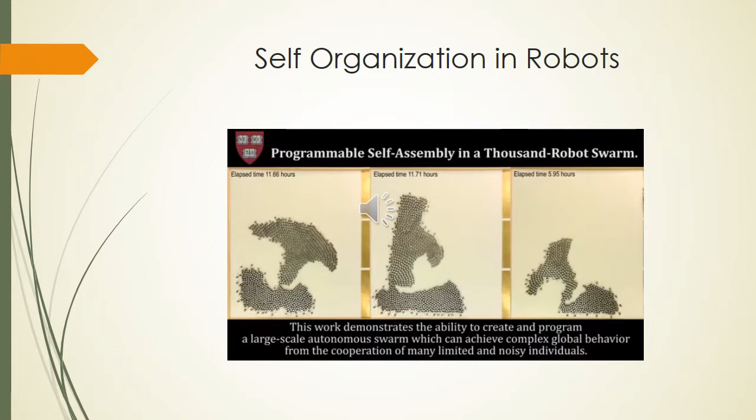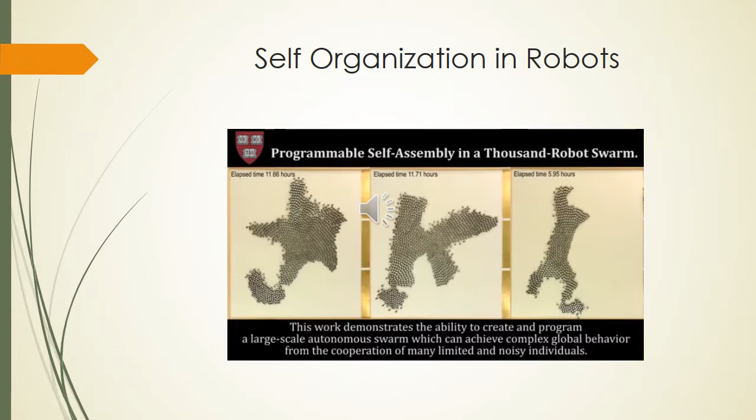In this slide, we have a video on a project conducted by Harvard University which employed self-organization in robots.

There are two types of virtual forces which are applied to the swarm. That is local force, which consists of attraction and repulsion, and which maintains the stability in a swarm, and an advanced force, which is responsible for the swarm to propagate to its goal. So using these virtual forces, stability is maintained in the swarm and it also achieves its goal.

The next method is a dynamic leader based swarm control. This is a central control approach in which a leader is leading a swarm. But unlike other control approaches, the leader is dynamically rotated in the swarm. This is done using a random competition-based clustering algorithm which is used to distribute the leaders as evenly as possible across the swarm.

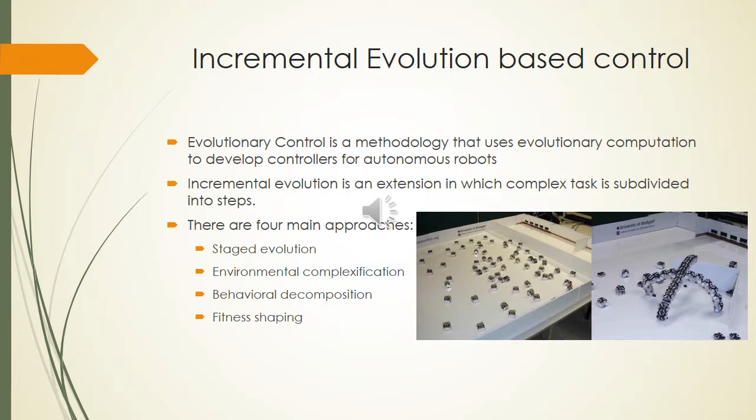Now, let us move on to the next area of research, that is, communication. The communication in a swarm robot can be divided into two categories. One is implicit, wherein the robots communicate through the environment, and another one is explicit, in which the robots directly pass messages to each other. Now let's see a couple of models in both the cases.

Pheromone communication is an implicit communication which was inspired by social ants. Ants communicate with each other using a chemical substance known as pheromone. Now, extending on that, virtual pheromone was invented and is used for coordination in the robots.

In this virtual pheromone, each robot sends its location to a pheromone server in the form of information packets, and the pheromone server locates the point on its internal map and updates it. The server sends back the intensity of the pheromone to the robot, and since this pheromone map is shared among all the robots, communication is achieved.

The robotic swarm communication network is an explicit type of communication in which the swarms are integrated with a wireless mesh network. The swarm is basically controlled and monitored through central servers, and within a swarm, robots can communicate through a self-organized mobile ad hoc network. A user can monitor the swarm through a PDA and can take immediate action whenever necessary.